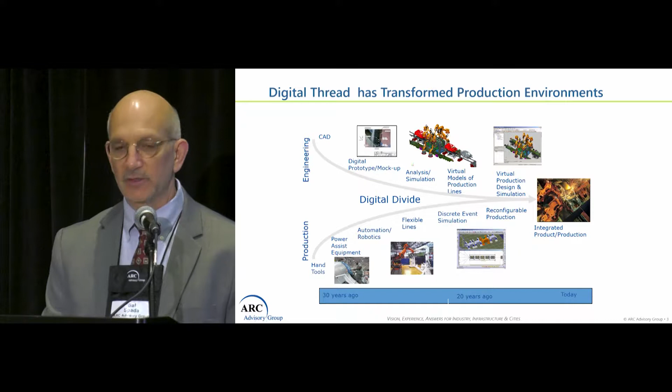But for the most part, we see a lot of this digital divide closed, and the only gap that remains is what I call using the data on the production floor, creating data, and using it for learning systems in your operations.

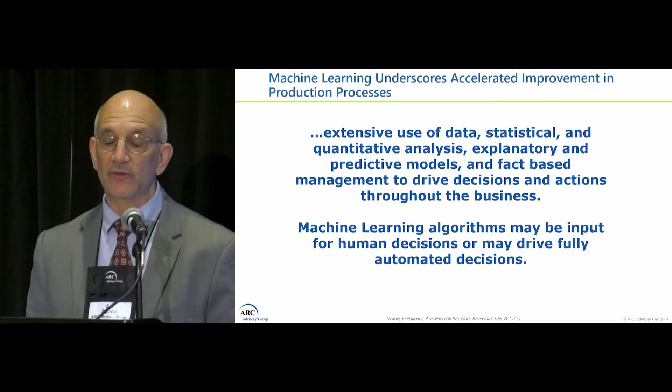So the way I look at machine learning, it's the extensive use of data, statistical data and analysis, and trying to explain the underlying systems in your production floor through modeling, and also making decisions using fact-based management. So I always use this type of explanation when I think about machine learning. It's about collecting information, repackaging it so that you can analyze it, and then developing learning algorithms that will identify behaviors that you weren't able to see under traditional information systems.

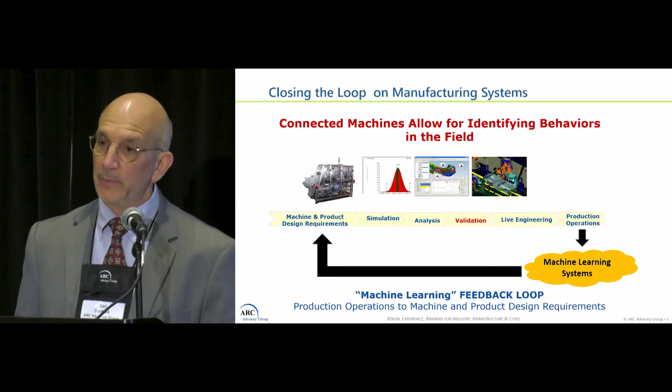So where I look at that closure, the original diagram showed the digital gap closed. But for the most part, people aren't closing the loop on manufacturing. And this is where I see machine learning in this diagram playing a big role. Machine learning playing a role in the feedback loop from the production operations all the way up to the design and process planning. It's very important to understand the challenges that are faced on the production floor, whether it's materials, whether it's machinery, or whether it's people. It can be all three at the same time, or it can be one or another.

The other facet of this, for the most part, hasn't occurred, but I challenge a lot of people when I put this slide up, and I say, over time, as we start to learn about our production systems, we'll start to be able to use software to our benefit. And that is, we'll have software-defined machines, that is, we'll redeploy them while they're on the production floor to adapt to those machine learning systems.

And so I would argue that the first software-defined machine was the Apollo 13, or that whole generation of satellites that were reprogrammed during their trajectory throughout the flight path. Of course, they were only using 4K memory, small 4-bit computers, and redeploying the algorithms throughout those flight paths. Today, what's Tesla doing?

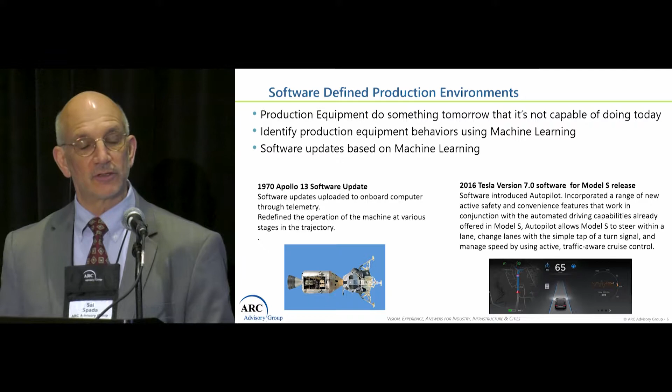They're redeploying their software based on the behaviors of the way the operators drive their car, or how the cars are behaving in certain road conditions. So they're really tunable machines through software. And I eventually expect to see that continuous improvement be deployed in the manufacturing operations.

There's always been a plateau that many companies have reached in their manufacturing operations. What they really want to do is break through that plateau. So through machine learning techniques, I envision we'll have a new series of plateaus created, higher performance production systems.

Through identification and automating the identification of problems and anomalies on the production floor through machine learning algorithms, we want to really reduce the time for problem identification. You can imagine today it takes possibly months to solve process problems. Now we'd like to shorten that time span through creating a data-driven environment that enables companies to identify the challenges they're facing in their production systems.

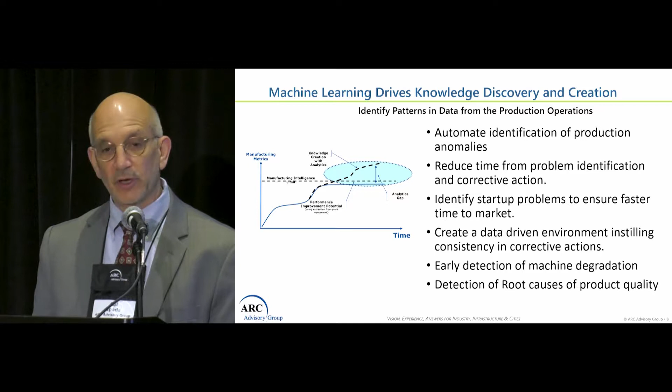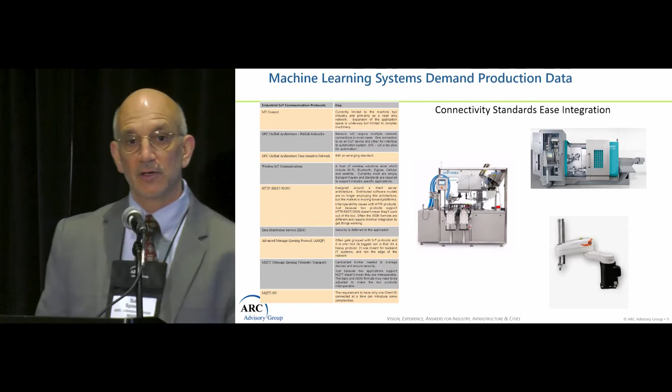But one of the other challenges they face with machine learning deployment is how do you connect to the equipment on the floor? The number of standards and networking interfaces, or even many of the legacy machines don't even have interfaces. You need to think about the cost of deployment and how we can improve the speed of that. We have a panelist today talking about those challenges they faced in the integration of learning algorithms.

We already see learning algorithms deployed today because the computing systems haven't just gotten cheaper and faster, they're phenomenal. You look at this type of vision learning algorithm on a production floor, they're using NVIDIA deep learning GPUs utilizing neural nets to produce learning systems so it can train the robot on the optimal way to approach a part. So it's really learning on the fly.

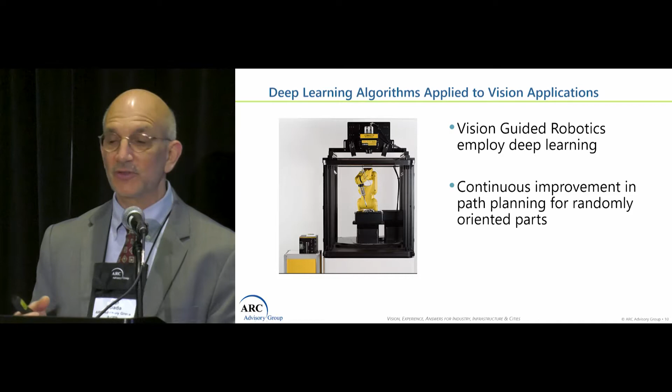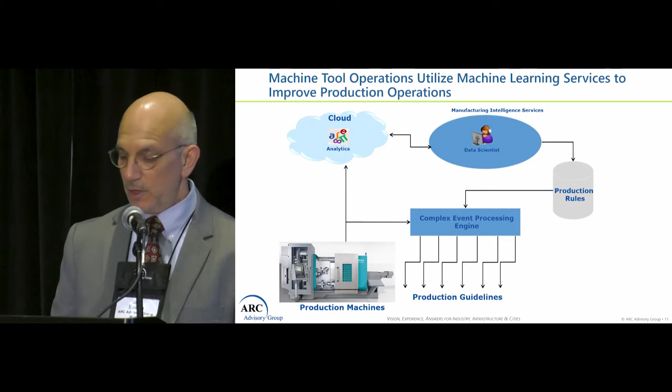We see other systems, a bit more complex, but the idea is we're pushing data into the cloud. This model is really driven by what occurs in the financial community, where they're using complex event processing that derives rules from big data analyzed over a long period of time, and new rules are being deployed on the production floor so companies can react or provide better procedures to their employees. This is an example of one system I've seen already in deployment using that idea.

What we really want to look at too is what's the cost of downtime today? If you look at some of these systems, automotive plants, this is probably low, it's probably $43,000 an hour or more. Some packaging operations, and we have a gentleman here from Church and Dwight who could probably refute me on this, but $15,000 an hour if you're thinking about making pills or CPG goods. So we need to look at the benefit not only from deployment, but improving quality, but also reducing downtime and the cost of material and labor cost loss.

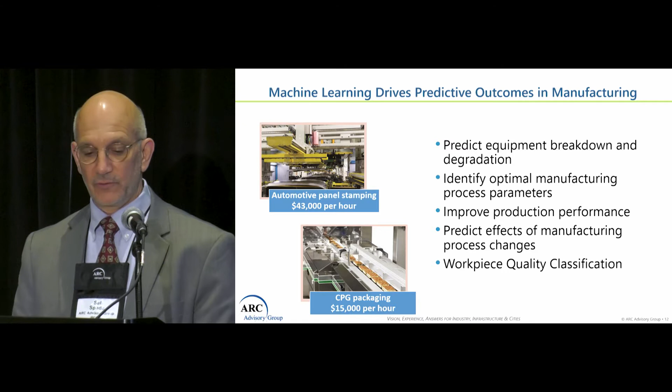So we really need to identify those optimal parameters for manufacturing. We need to predict equipment breakdown, which would be ideal. And we also need to improve the overall production performance. We envision that machine learning systems will support these types of goals.

Where I see the future of automation, in the left-hand corner of this diagram, you see what I look at as traditional automation systems, whether it's a machine or a robot or a press or a packaging machine, but they all fundamentally are pre-programmed systems that analyze, act upon their sensor input, and perform a task. However, what you want to see is we move up into the right-hand corner of that grid, where machines not only perform those traditional tasks, but also act more autonomously, adapting their behavior so that they can perform outside of the envisioned window of operation. And that would be ideal.

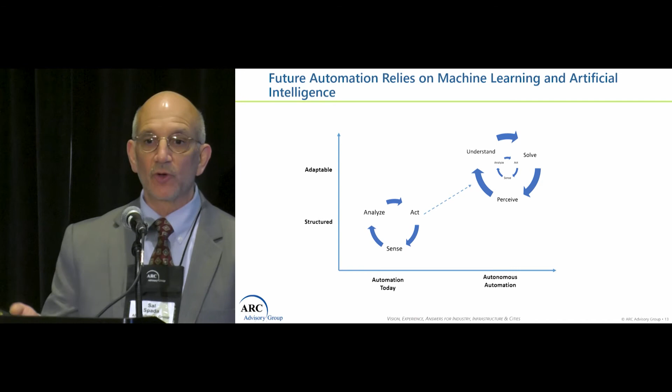Place a robot on the manufacturing floor, show it a part, and it will decide how it's going to pick it up.

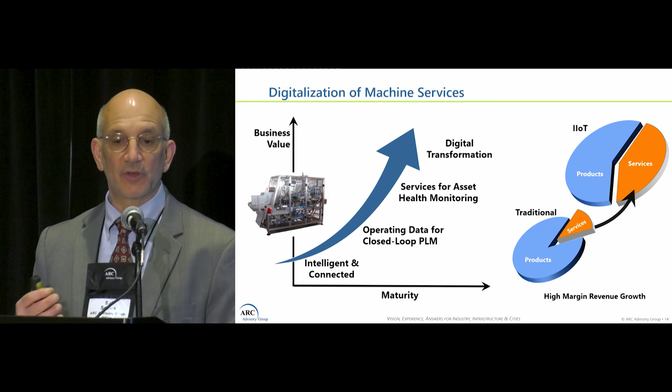The digitalization and machine learning capabilities are also transforming the way machine builders will run their business. They not only go from just developing, but shipping intelligent connected machines, but also looking for a way of providing additional services. Some machine builders will even provide not selling machines, but selling output. There's a whole new world of business opportunities for machine builders who start to adopt some of these machine learning and connected ideas.